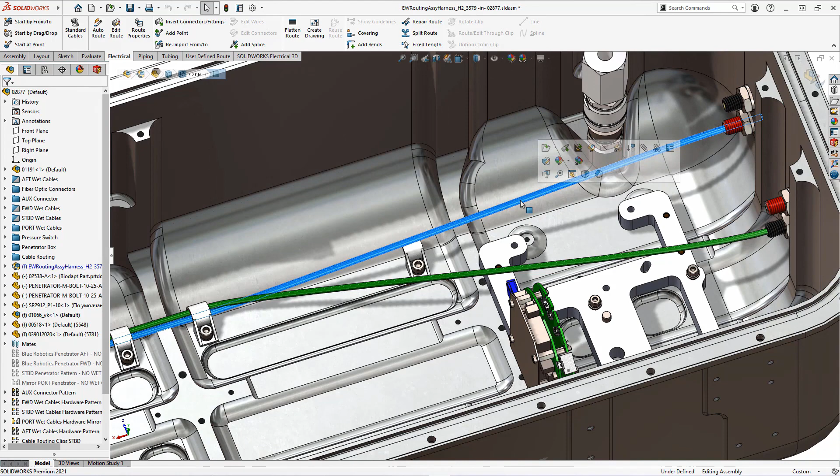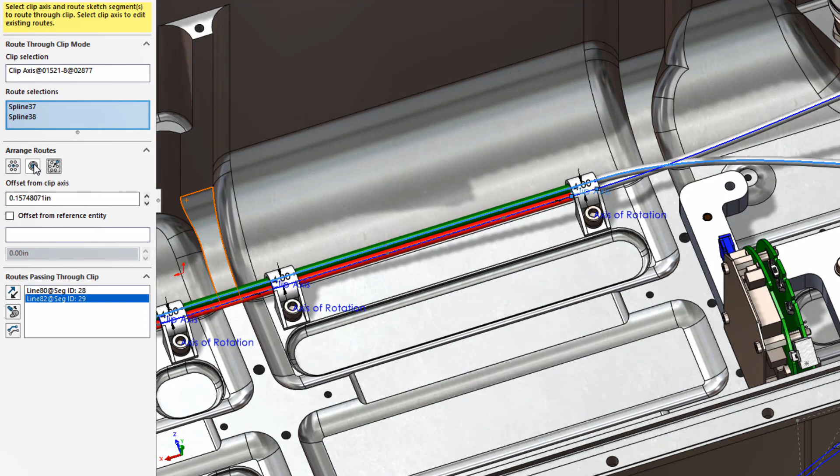Choose the Route Edit Through Clip tool and then select the axis of the clip. Then choose the wires you want to route through that clip. In the Property Manager, the new Arrange Routes section allows you to manually arrange wires with user-defined offset, merge routes to a single point, or auto-arrange the routes.

We can repeat this process for the clip on the other end to secure the red and green wires through that clip. It's just that easy. These enhancements will help designers to quickly secure wires, cables, and harnesses through clips, using the new controls within the Property Manager.

If everything we design were only a square or rectangular shape, we would never need to use splines. However, in the electrical world, the path of electrical wiring and harnessing can take many forms. In SOLIDWORKS Electrical 2021, the route harness functionality has been enhanced to now support the use of both splines as well as lines to create route paths.

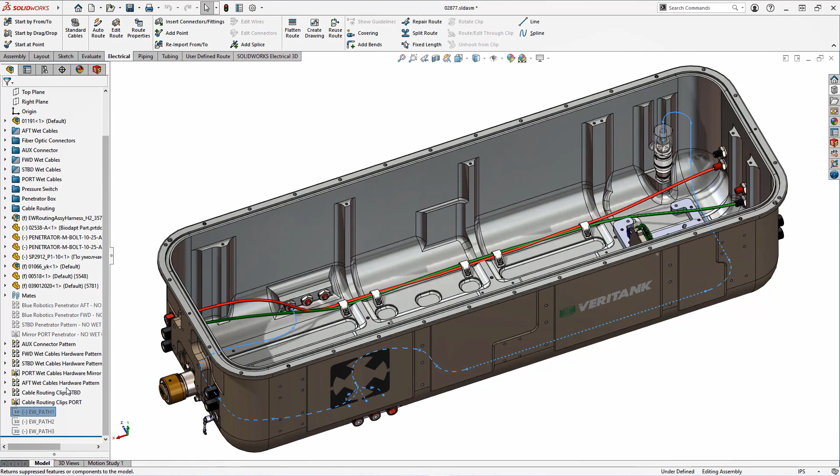In this example, we have created a routing path using both splines and lines for the harness to follow. This will connect from the transducer to go under already routed cables and follow along the wall. Let's adjust several of the arcs and curves to obtain a smoother path.

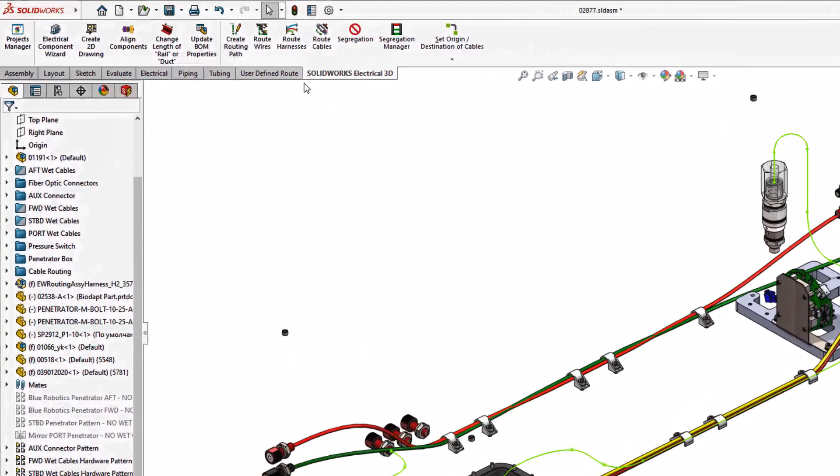In the 3D Electrical tab of the Command Manager, choosing Route Harness opens the Property Manager, where you'll find another new option to allow routing as a spline. After routing is finished, the harness followed the predefined path we created.

To finish up this harness and reduce waste of material from cutting 3 conductors shorter than the longest wire, we will add the splice to the wire so all conductors in the harness are cut to equal length.

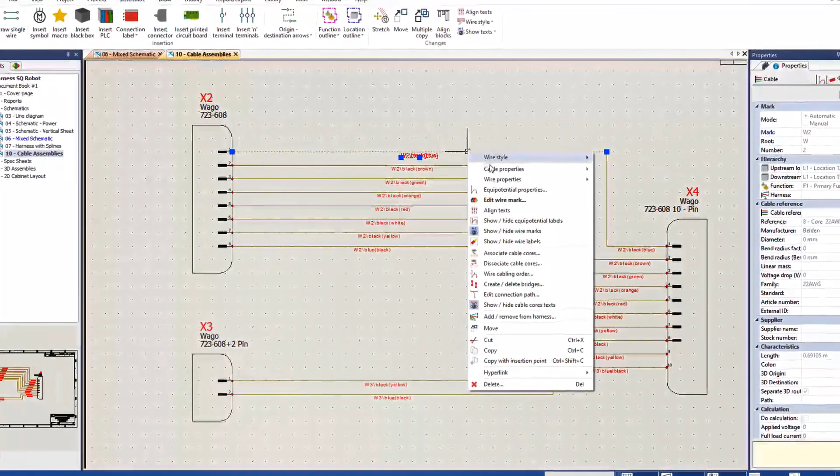It's a common practice to have multiple cables starting from a single connector and then have each of the cables go to different parts of the electrical system. Routing all of these different cables as a single assembly does not provide the flexibility that designers want.

In SOLIDWORKS Electrical Schematics 2021, cable properties have been improved with the addition of the new field Separate 3D Route Assembly. The same parameter can also be controlled in the SOLIDWORKS Route Cable command, giving maximum flexibility to users on how and where they want to use this new parameter.

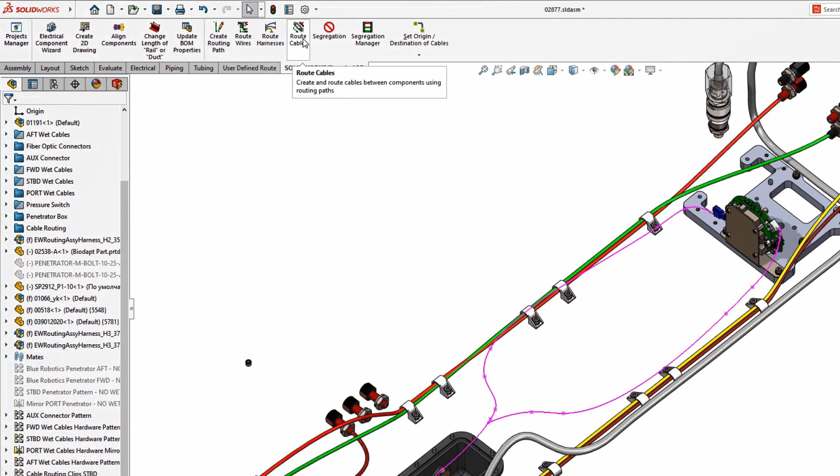We have already created 2 separate routing paths, one for each cable starting from the round 10-pin connector. The cables then connect to the board that controls navigation sensors. We will choose to route these 2 cables at once and as separate assemblies.

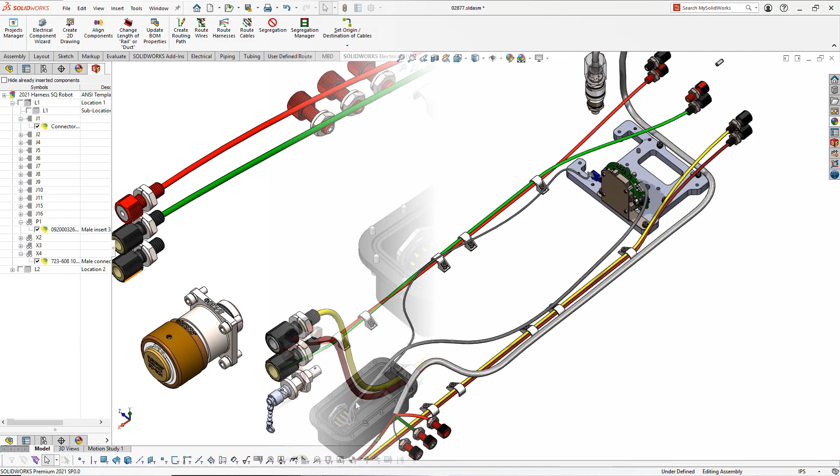This new separate routing assembly of cables allows designers to create more complex and feature-rich assemblies by bridging the needs of the mechanical, electrical, and electronics disciplines.

SOLIDWORKS Electrical Schematics 2021 sees the introduction of a new manager for terminal types. All new symbols representing standard terminal types are available, which can all be customised by the user.

In order to use these symbols from the terminal drawing, you'll firstly need to edit the terminal drawing configuration in use. By default, the Insert Custom Symbol option is unticked, which means the basic types shown here take effect.

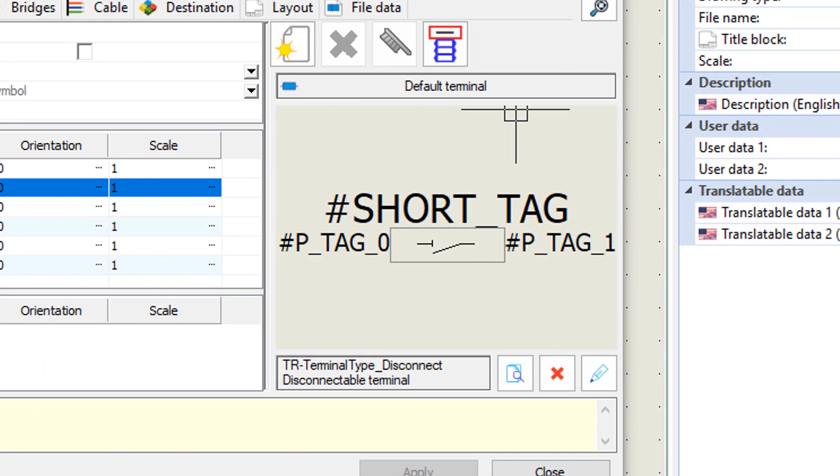You can now browse and select a suitable symbol for terminal types such as your default terminal, accessory, and earth terminals. The drawing produced now clearly shows the specific details of the terminal strip and improves the design's accuracy.

With the Insert Custom Symbol option now ticked, you can choose whether to use a scheme symbol or manufacturer part terminal type information. You can also vary the priority between using the terminal type or terminal strip attributes.

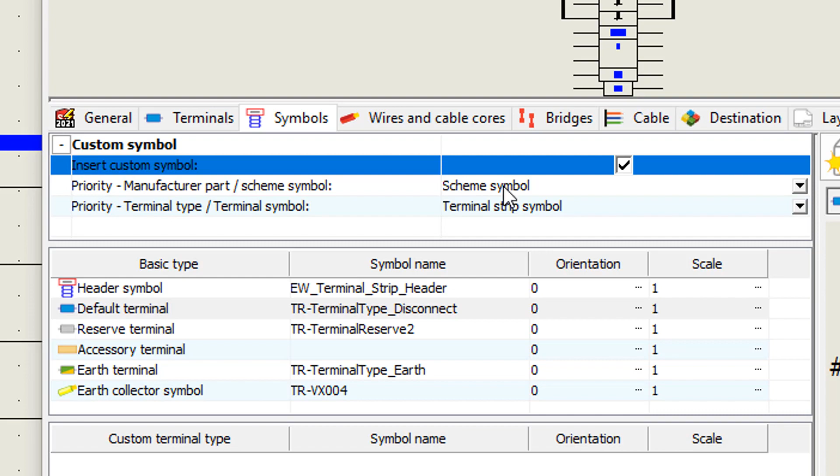Here within the scheme symbol, we can see these 2 options. The configuration is currently prioritising the terminal strip symbol and therefore shows the disconnectable and LED terminal graphic on the drawing.

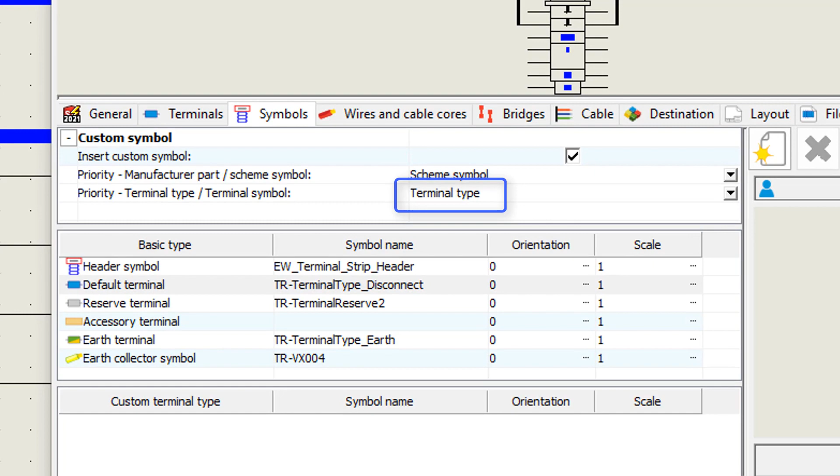If the configuration is changed to prioritise by terminal type, then the drawing will change to show the disconnectable style when next published.

There are also similar options for terminal type within the manufacturer part properties. These new enhancements mean that entire terminal strips can be accurately documented and managed in SOLIDWORKS Electrical Schematics.

In SOLIDWORKS Electrical 2021, there is a new Exclude from Bill of Materials option, which gives a more streamlined workflow to remove parts from electrical reports. The option can be accessed in one of 2 ways.

You can either edit the manufacturer part within the library and tick the option to exclude from bill of materials. This will then apply whenever the part is used in a project.

Alternatively, if you prefer to have more control on when to exclude a part from the BOM, you can also change the option on individual project instances.

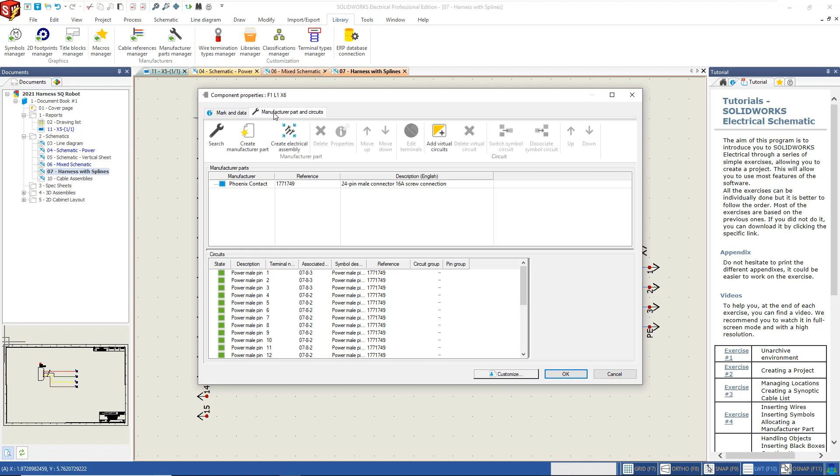In order to not see these excluded parts in the electrical BOM, you need to turn on the filter as shown, which can be found in the BOM properties.

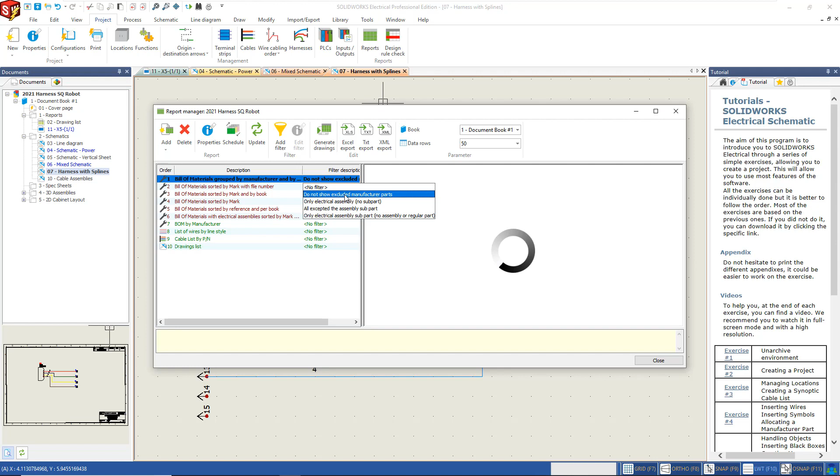All 2021 reports come with this filter as standard, but it can also be coded to appear in any customer BOM. The exclude from BOM workflow could be used for termination parts such as crimps that you don't require in the BOM, or perhaps customer supplied or existing system components.

This option can also propagate into assemblies and the 3D parts if using SOLIDWORKS Electrical 3D. This ensures a consistent and synchronized approach when the electrical designers and mechanical team are working together.

The popular technique to start an electrical project from within Excel has been improved with the introduction of a new add-in within Excel. To install the add-in, you need to select the install option from within SOLIDWORKS Electrical, which may require additional permissions.

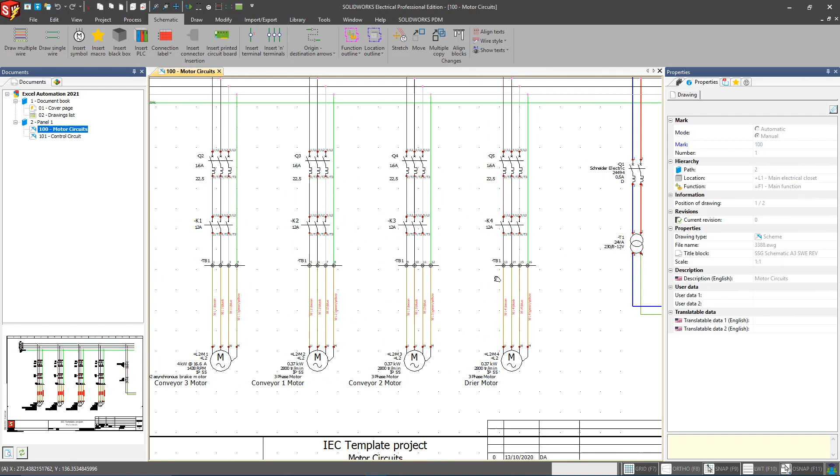Excel automation can be used to automatically insert sheets into a project, complete with electrical macros containing full circuit information. This can vastly speed up the electrical design process by making use of pre-created standard macro content.

This process could even be driven by engineering managers or even non-technical staff such as sales operatives, who would simply be modifying an easy-to-use Excel sheet to create the project.

The new release also boasts improved wire management options found within the project configuration. Here's a quick run through of the features.

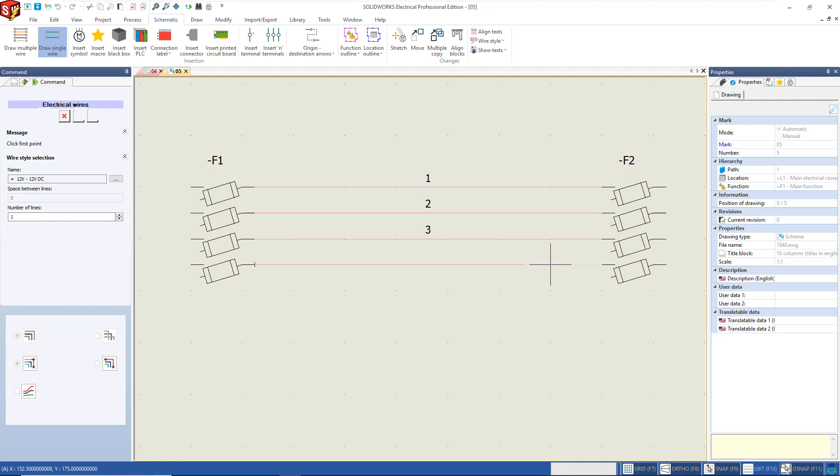If ticked, the add wires automatically to equipotential option will mean that a drawn line is automatically created as a wire within the software. Therefore, it has wire properties and not just equipotential.

If the remove wire when disconnected option is left unticked, this now means if a wire is only connected on one end, this can still feature in your wire list. This can be really useful for showing flying leads, amongst other applications.

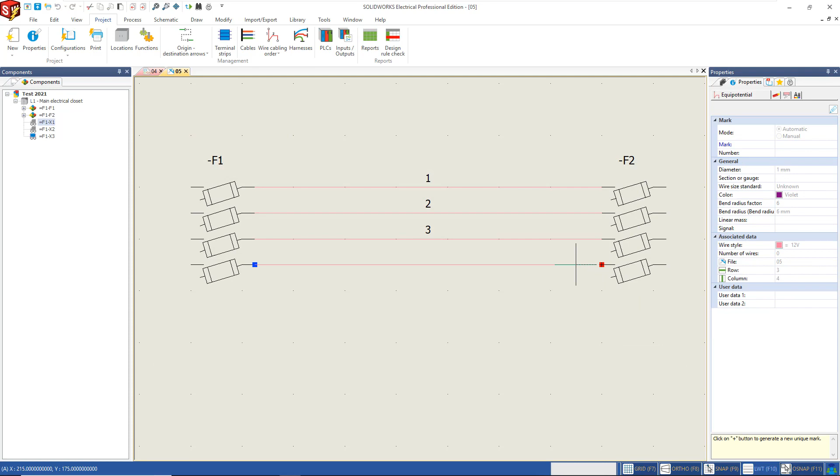Finally, the fill the gap when remove scheme symbol option can be used to automatically connect equipotential on both sides together without causing a short circuit. Or alternatively, leave the equipotential separate on the scheme.

SOLIDWORKS Electrical 2021 sees introduction of the external archiver, which allows an external application to create application backups. The first backup should be actioned from within SOLIDWORKS Electrical in order to set your default settings.

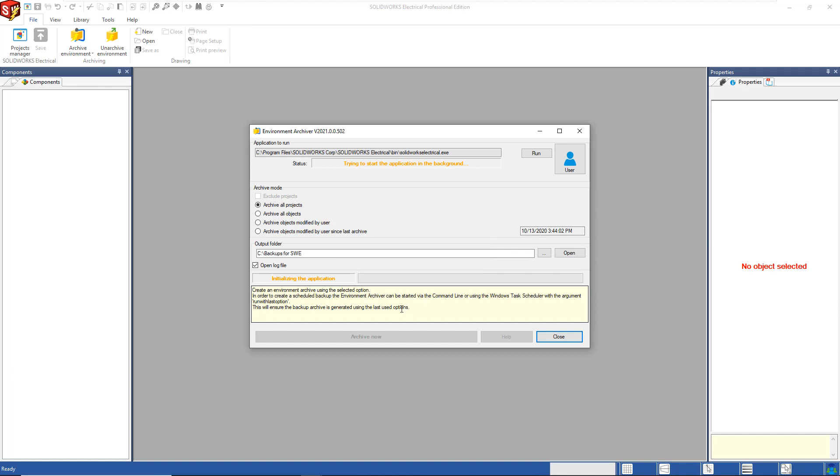This should include the All Objects option for a complete backup, as well as specifying the output path for the backup. Once run for the first time, the archiver can then be ran, or even better scheduled, within Windows Task Scheduler or via command line prompt.

In order for the task to run, SOLIDWORKS Electrical must be installed on the same machine as the task and also have a valid license available.

For this reason, we'd recommend installing the client software on the server machine to allow IT teams to run the backups remotely. New for 2021 is the release of the SOLIDWORKS Electrical Viewer, which is a free viewer tool for access to the native SOLIDWORKS Electrical project.

The viewer would be most useful when used on a client server installation. The viewer enables non-SOLIDWORKS Electrical users to be able to view project documents without the requirement of having a license.

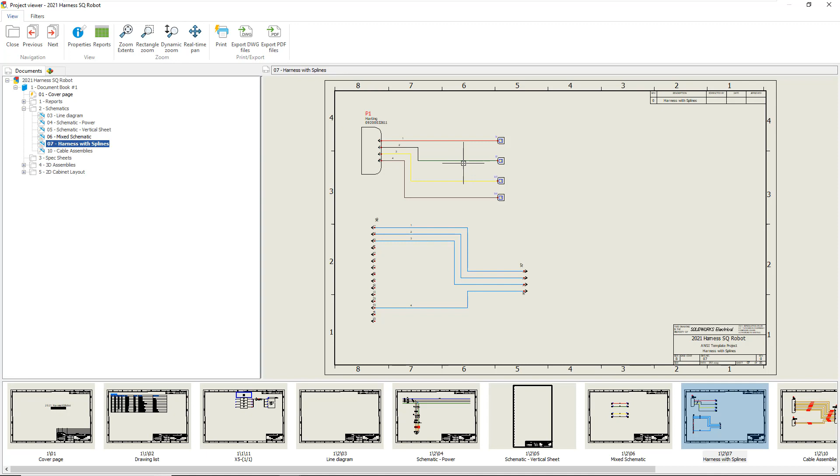Within the viewer, you can easily browse through individual sheets, as well as having the option to drill down and search for a specific component mark or part number.

The viewer also gives access to reports such as the BOM, wire and cable lists, giving the reader a clear view of the project outputs, even having the ability to create exports to XLS or CSV, as well as the ability to export the whole project as a PDF.

All of these new features make the 2021 version the best ever release.